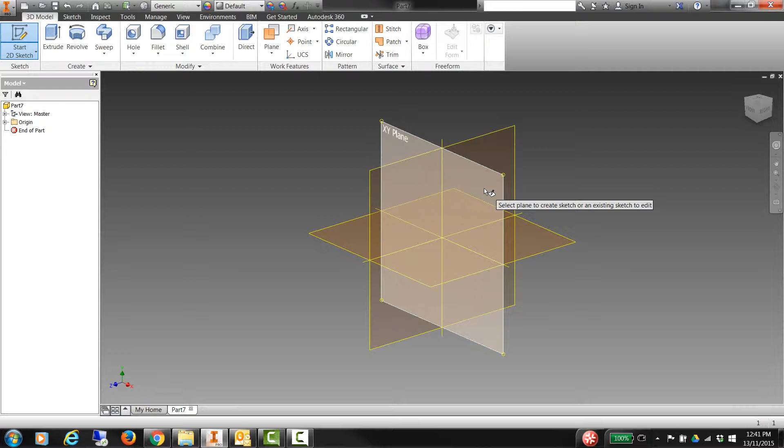This tutorial is the second last in this series and is the solution to drawing 4.7, the angle plate. So we shall begin, as always, by creating a 2D sketch on the XY plane.

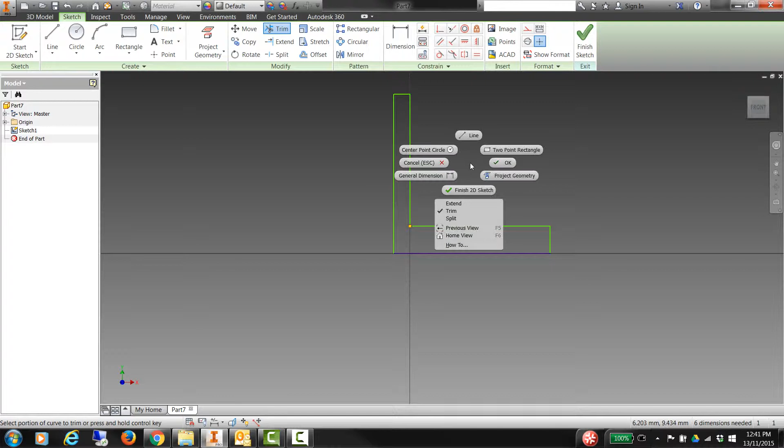So we're going to begin this by imagining we're standing at B and drawing what we see. So what I see is two rectangles. Right click, trim. So let's get rid of that. There's an L shape, then we'll dimension them.

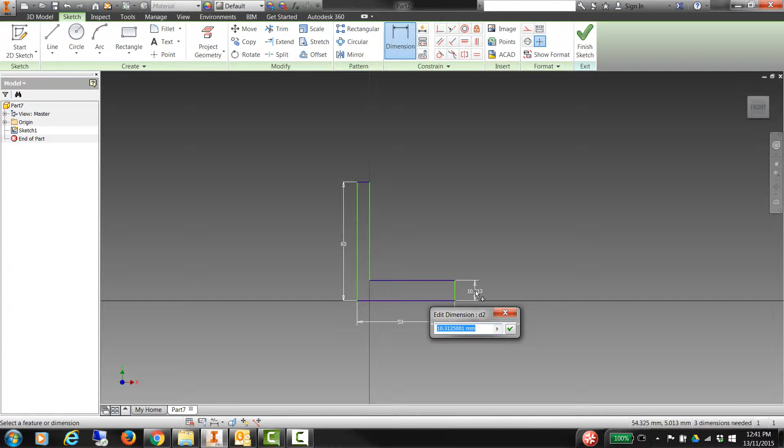So this is 60. It's 50 here. The height is 10. And this is 12. That looks pretty good. Finish the sketch.

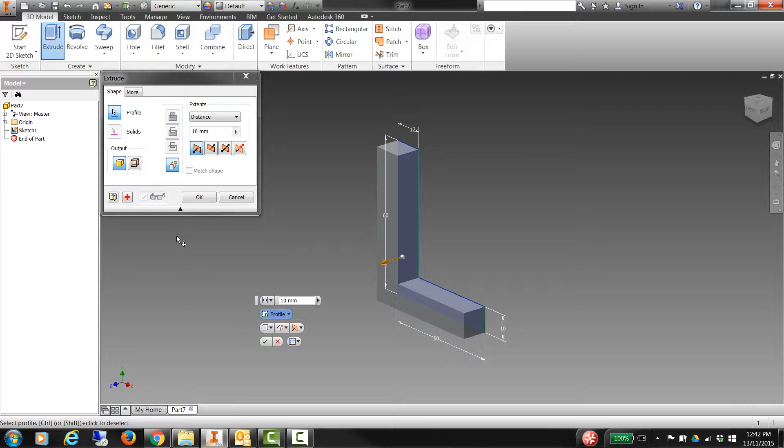Click on extrude. So this extrusion will be 90. So let's click in here. Like so. On the corners, this corner and these corners, we have chamfers, which I think we'll put in now. So we'll go to fillet, and then underneath fillet is chamfer.

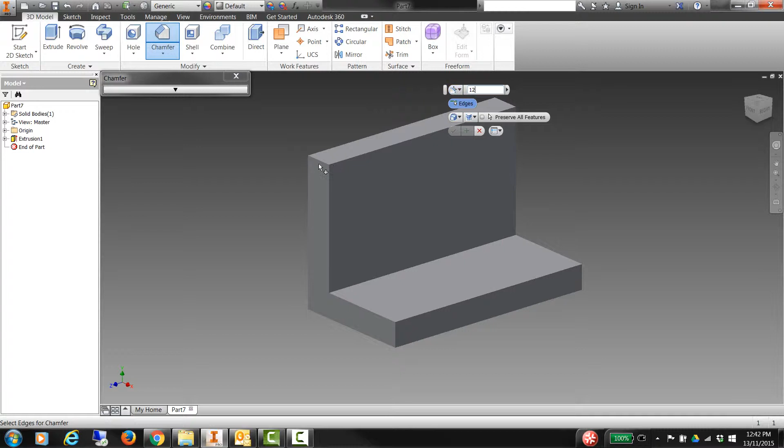So the chamfer value is 12 for the top ones, and then you just select the edge here like so, hit the tick, chamfer it again, we'll just select the edges here, then change this value to 6, and that's correct. The next part is to create the triangular gusseting that is around about here.

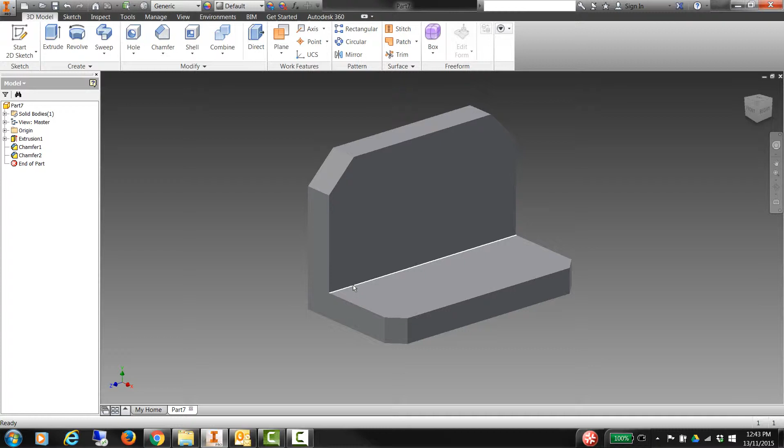The best way I think of doing this is to create a work plane that comes in 10 from the edge like so. So if we click on there are a bunch of different planes here. I'm going to just use a basic sort of one where you click and drag in the direction you want to go, and then type in how far you want it to be from that face. So this is -10. Tick.

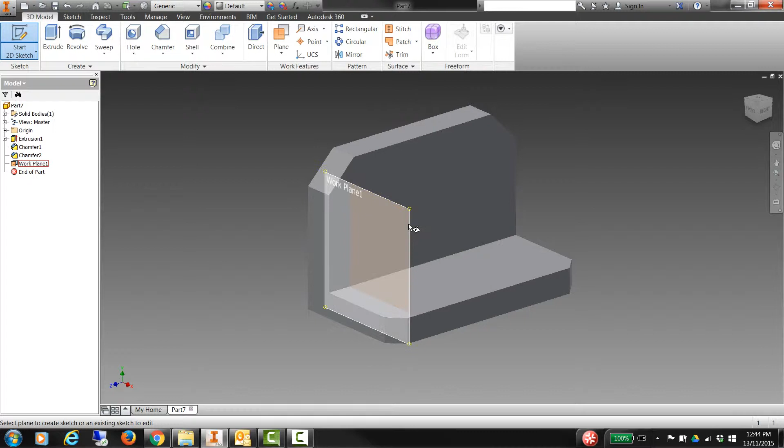Okay, now we'll create a sketch on this work plane which we've created. In order to better see what's going on here, if we press F7 on the keyboard, it cuts the drawing at the work plane. It's only a visual thing, it doesn't actually lose anything, because as soon as we get out of this view, it'll all come back.

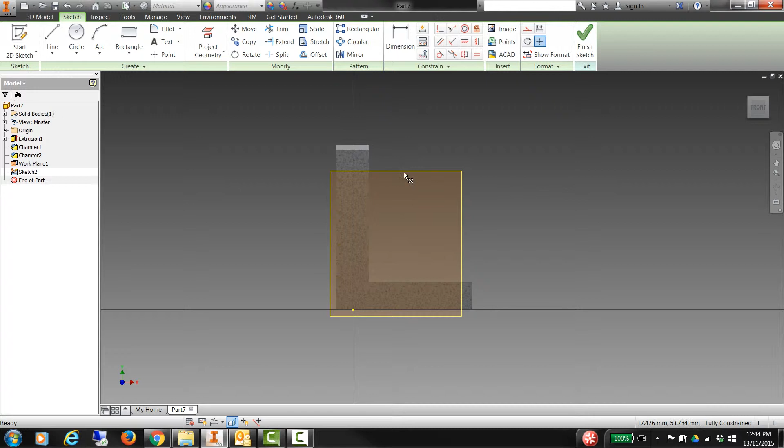So we're going to create this triangle by projecting geometry which is not on the plane yet onto the plane, and you can see that here there is nothing. See, that's not part of it. So what we want to do is actually take this geometry and click it, and it puts it on the work plane, and the same with this here. So we have those two.

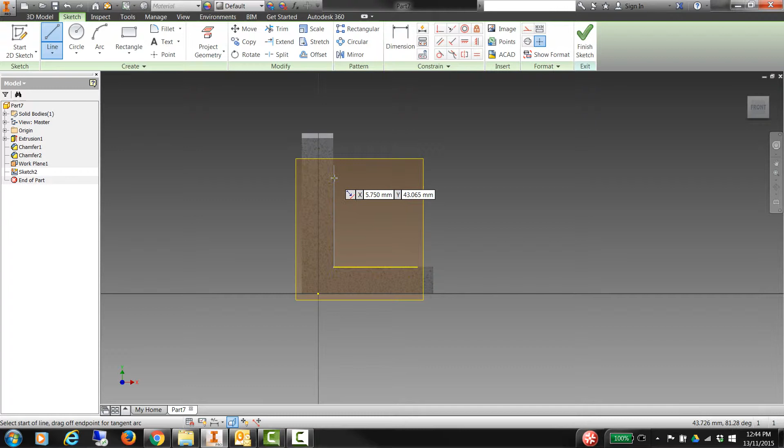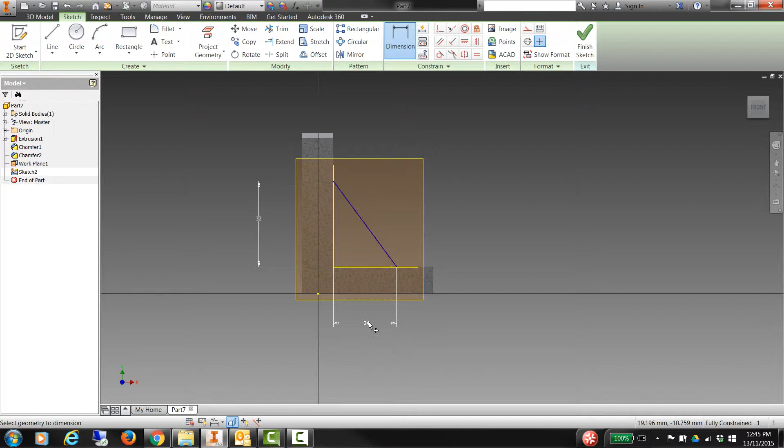Now we can just put a line from there down to here, and then dimension across the points. So right click it, general dimension from this point here to this point here. That's 32. And then again from this point here to this point here, which will now be 24. Finish the sketch, and then we can simply extrude this the other direction and a distance of 10.

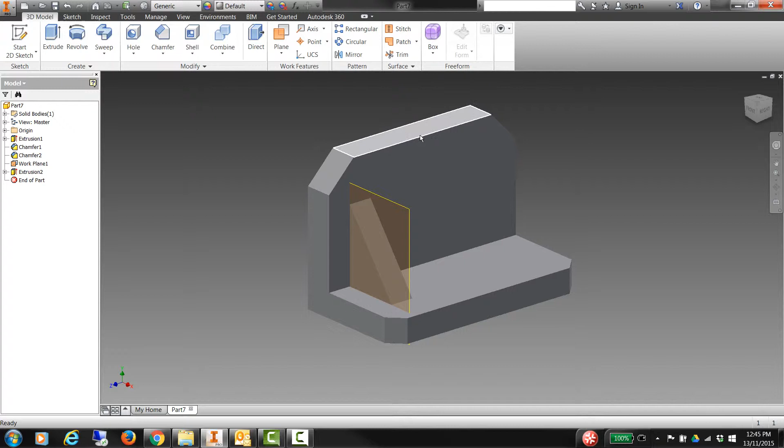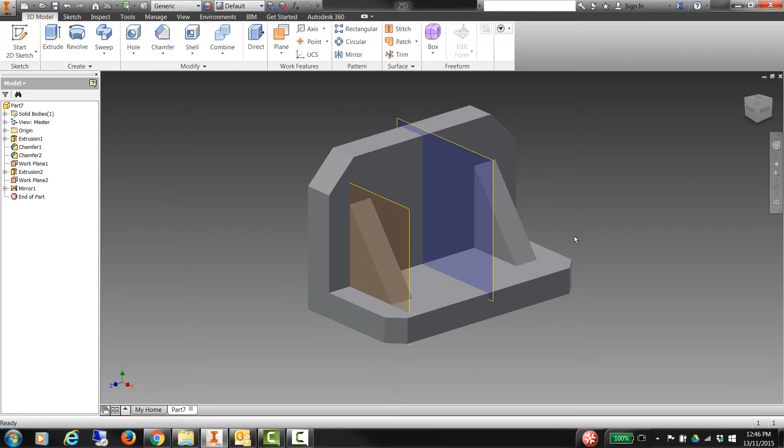Okay. Now we could go and do this process again, but I'm far too lazy for that stuff. So what we'll do is create a work plane in the middle here that we could use as our mirror plane, and just flip this one over to the other side. So plane, look for 3 points, go click, there's another one here somewhere, click, and so here click. So here's our mirror plane, and we'll go mirror, select the feature, select the mirror plane, and say OK. And by the wonder of Inventor, it will invent it over there for you, which is cool.

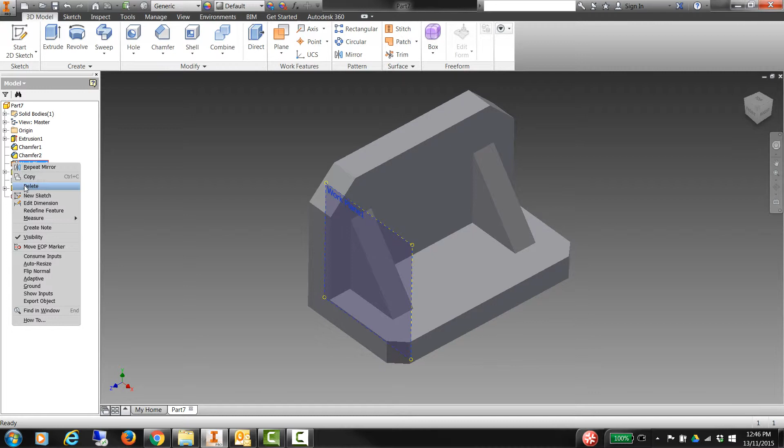If you don't want to see these planes, they are over here, like so, and you can right click and uncheck visibility and they will be invisible. If you delete them, however, that's not good because it will delete everything that you drew on them, so just be aware of that.

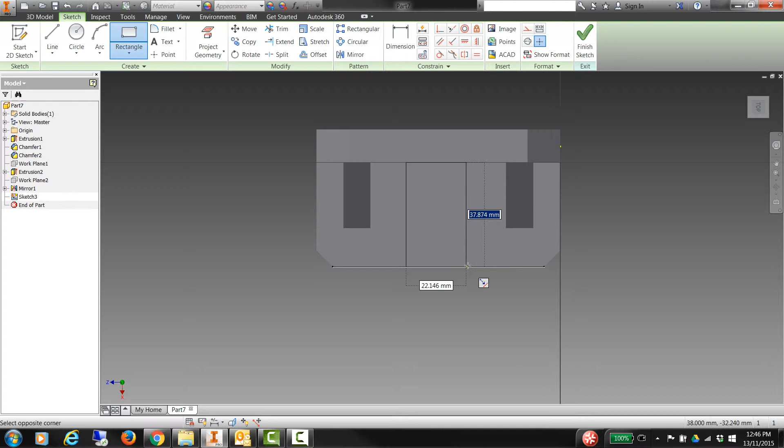Okay, the last bit is to draw the rectangular hole thing here. So let's begin by creating a sketch, drawing a rectangle like so. Use dimensions. So that's 30 in from that edge. This is 30. Oh, no, hang on. That there is 30. And because it's 90 wide, that must be 30, so I'm not going to put that in.

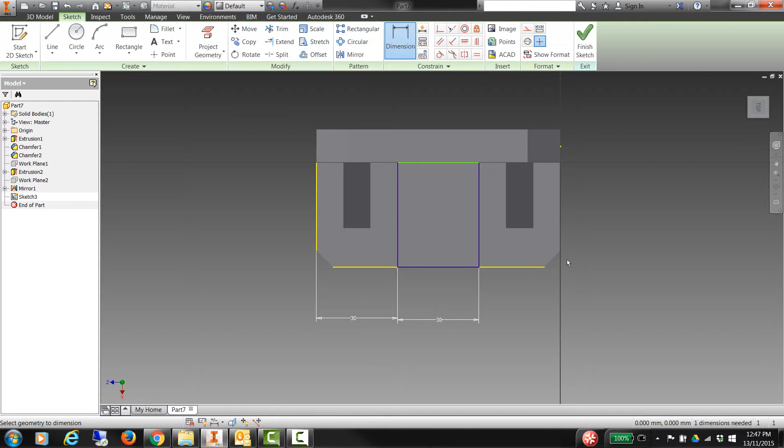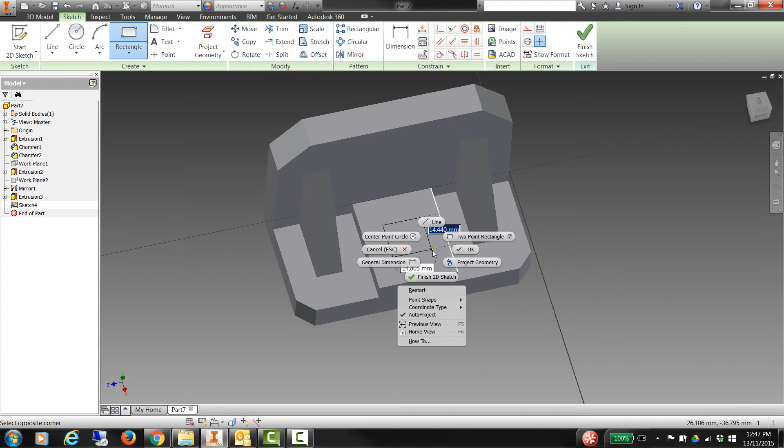We can also then just extrude that up a distance of 6. So we'll finish this sketch. Extrude 6. Create another 2D sketch on the top here. Draw another rectangle. Actually, that's a little bit hard to see on that angle there like that, so we'll do it like this. Like so. Not quite sure what happened there. Let's try that again.

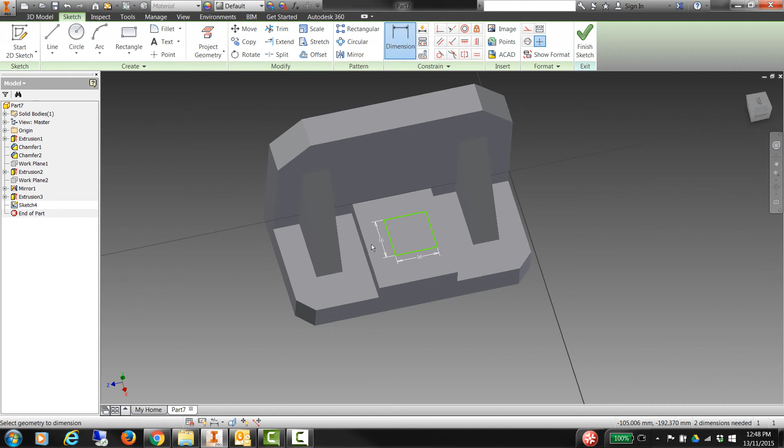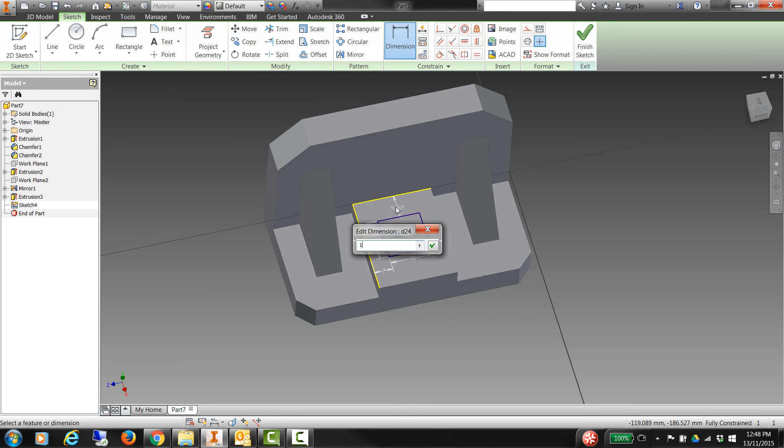Yeah, okay. General dimensions. So the annotation on the drawing shows a square 16. So that literally means that this is 16 by 16. And it's 7 in from this edge. Really? Why would you try and do that? Seven and 10 from the back, so like so. Finish the sketch and extrude that as a cut through everything.

And that's the angle plate complete. Okay, one to go.